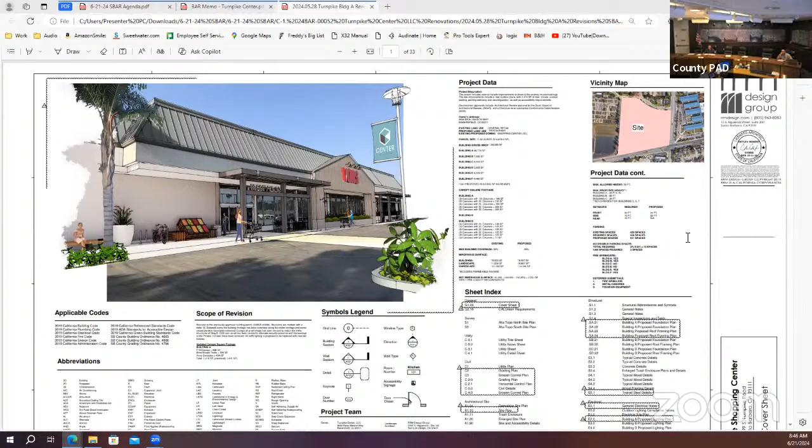Okay, I looked at the drawings online, everything seems to be fine. What we asked for was a rendering, and there were some landscape comments that I think you addressed too. Robert, you may want to look at that.

It's always at the end, Robert, I'm sorry. Planting, yes, yeah. Oh yeah, bike rack details. Is there such a thing? Do you have the bike racks? Oh, okay.

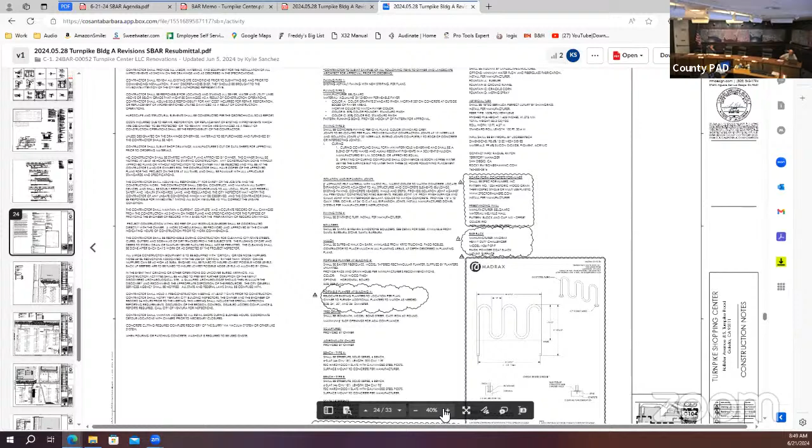I see it there on the left of the bike rack. Good to go? Is there planting specified for the pots?

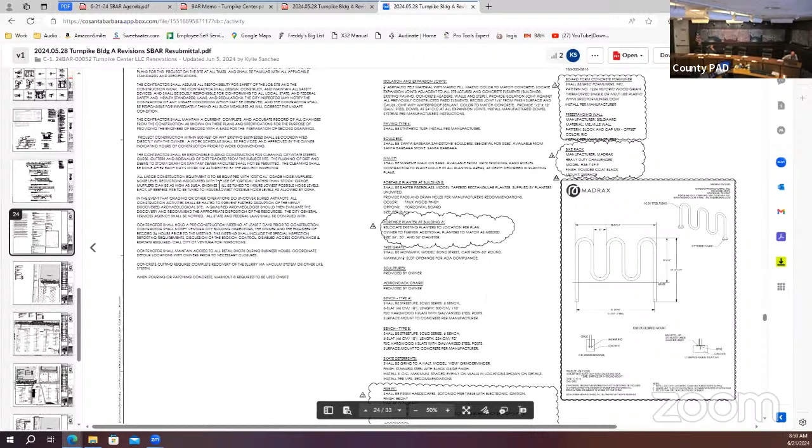If you want to do 33, correct? Well, mine said it's a little different.

Okay, yeah, I just went through the plant list. I think it's all good, and that stuff will work in the pots. So I think everything is okay, been addressed, ready to go. Okay, we'll approve it at the main meeting. Okay, thank you for coming.

Oh, really? Okay, maybe on consent. Okay, great. Nice seeing you in person because it's everything's online. So

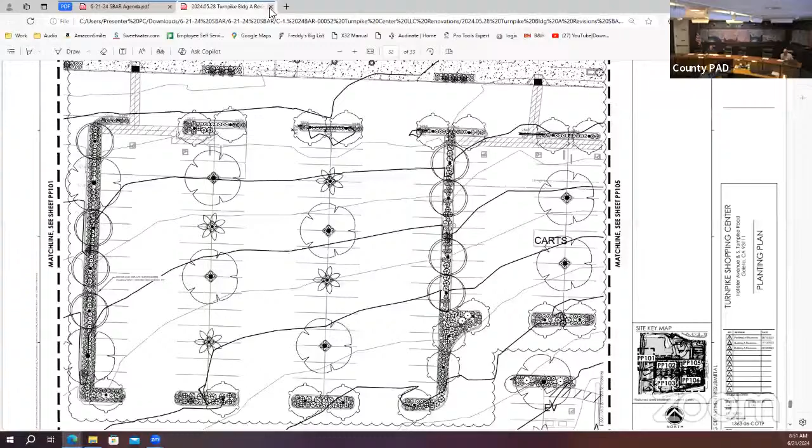Was the detail demonstrating the color of the Vons trellis, was that?

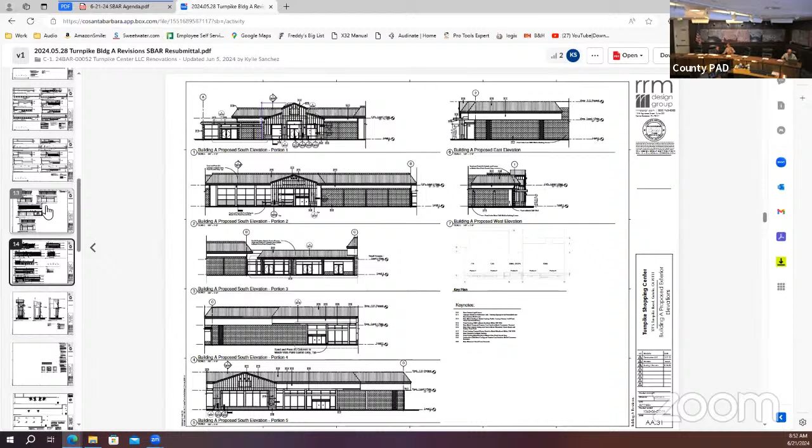It's just the color of it. Okay. And now it is, oh, you just slightly adjusted the color. Okay, sounds good to me. Thanks.

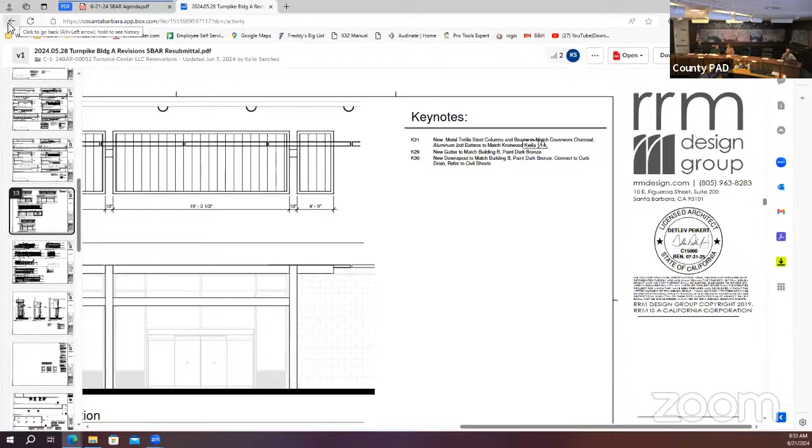Yeah, it's a big improvement to what it was before. Planting looks good from the corner too. So.

Oh, yeah, that's a high traffic environment right there, huh? Yeah. Well, don't all the kids, they go over there to get lunch too. Yeah. They let you cross the line. And they got that hot dog place right there, right? Yeah, yeah.

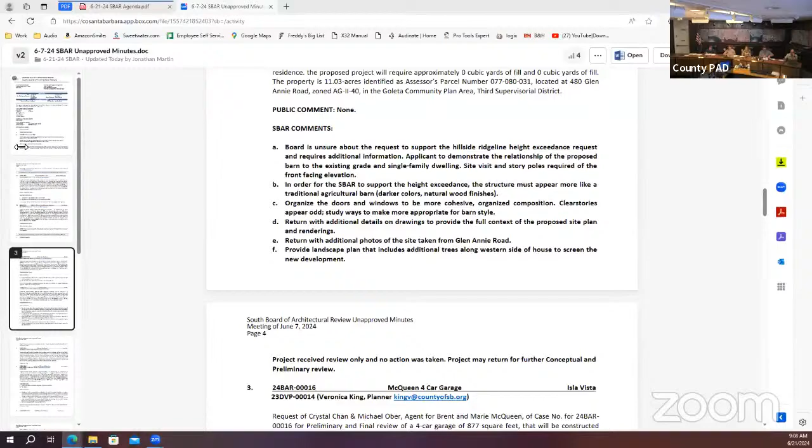I think it was something like provide access from sidewalk through front facade to shared open seating space. It was like we wanted a door that was in the middle instead of just pertaining to the businesses. Or could it say an opening? No, not necessarily a door. I mean, some sort of access and opening. Yeah, how about provide more open access along sidewalk?

Connecting sidewalk to shared seating space. Well, the problem with that is you're gonna lose landscaping if we just add more hardscape out front, and it's already right up close to the sidewalk. So I think it was more about just the sense of connection from the street to the interior of the structure. And I don't think it has to be a doorway necessarily.

I think there was confusion because whoever made that comment didn't realize that the big storefront windows also had a door. Yeah, yeah, yeah, but I made that comment. I heard you, somebody said it and they said, oh, okay, yeah.

We also wanted a sense that the patio should move to the sidewalk side rather than the freeway side. Does that comment say that? Yeah, it does say it. I think the comments are fine.

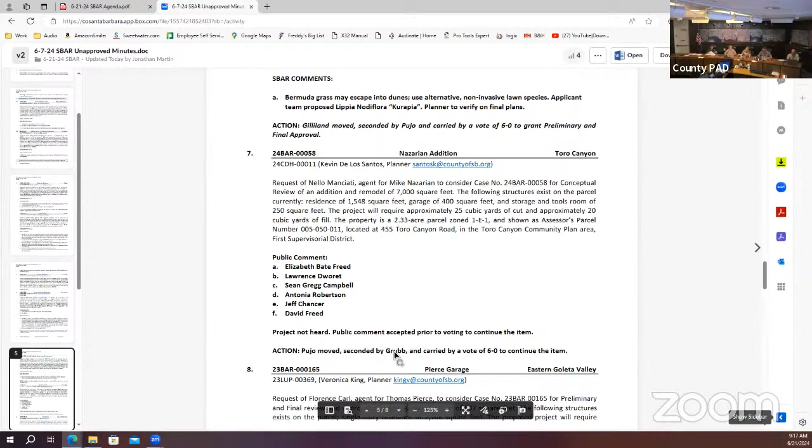It doesn't matter too much, but I don't think I was the second on that. Maybe I was. Trying to remember now. It doesn't matter too much probably. Okay.

On number 8, it says public comment none and then lists people. He just stood up, he didn't say anything. I don't know, thanks, got that correction.

All right, anything on 8, 9, or 10? They're all pretty positive comments. And 11.

This one was the tricky one with the ADU and the modification for the front yard setback. Like what we said, yeah.

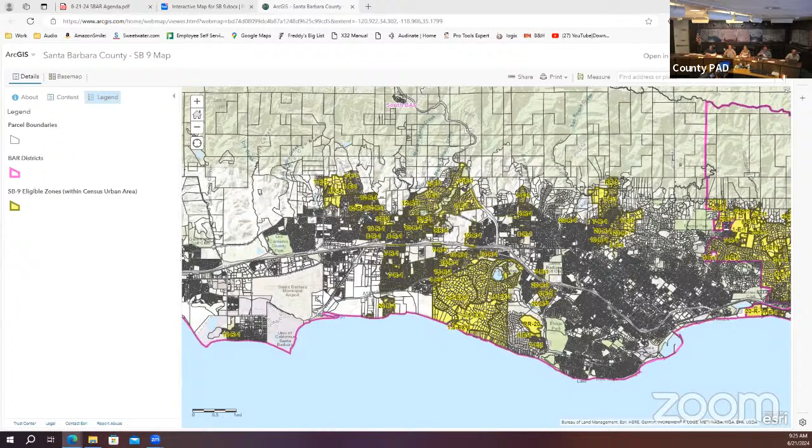Yeah, if we go to 9, I think 11 is a good page to go. Would you like to just pull up that PDF that you had earlier? In page 9, go to 9. Yeah, there you go.

Facade, does it mean front elevation? Where does it say there? Building facades more than 30 feet. Do you mean by facade? Usually in the dictionary, or architects understand facade as the elevation facing the street or facing the public. Is that what that is meant, or what? No, that's not what we meant. It's just meant to be any elevation, any wall or elevation more than 30 feet in length. So then it should say building walls, because it's clear, because facade means only the wall of the front there. Got it. Okay. Is that what you want to say?

And I have a lot of questions on 11, materials and colors. Rather than building walls, should we say building elevations? Building elevation, I think yeah, more- walls is yes, no, maybe too little specific. Building elevations, okay.

This is difficult. The first point is a little bit redundant in terms of materials. It says stone veneer, and then it talks about granite and slate, which are also stone. And then it talks about stucco and plaster, which are synonyms. Stucco is what people not in the trade refer to as cement plaster. So I would suggest to just say wood, composite wood, stone, brick, plaster - and in parentheses put stucco if you want - fiber cement, and then vinyl or metal.

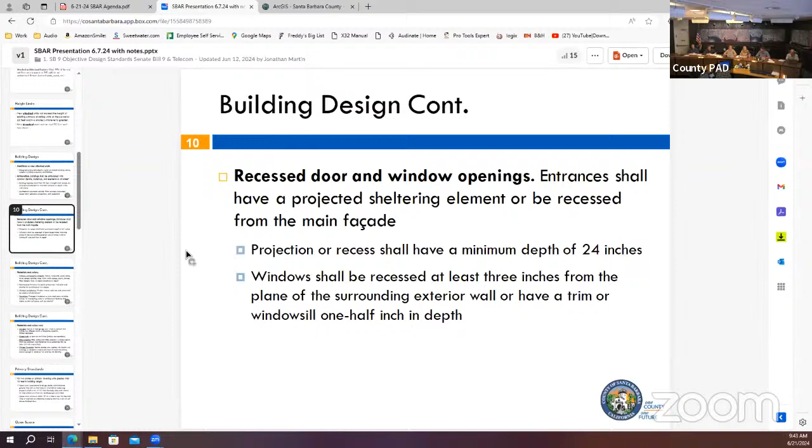So let's go back to page 12 then. So we have something for slope roofs already, right? We have some language. Then we need another point for flat roofs - how about flat roofs establish hierarchy, use darkest cool roof.

Well, there's two things. One is to establish a hierarchy of forms - maybe the parapet height, breakups, or some detail in there, or different heights of roofs - that's one thing. The second one is the color, right? Can it just be as general as 'establish hierarchy' and not mention parapets and all of that?

And then the second point would be use darkest cool roof possible, or ballast. So right now we have the LRV value of 0.84. Would that address that on the roof? White roof, for instance? Oh, maybe.

Yeah, but I'm not sure if that's how you measure white roofs. I'm not sure if that's for reflection on metal roofs or something like that. I'm not sure if that works on white roofs, on flat PVC membranes - just looking at color.

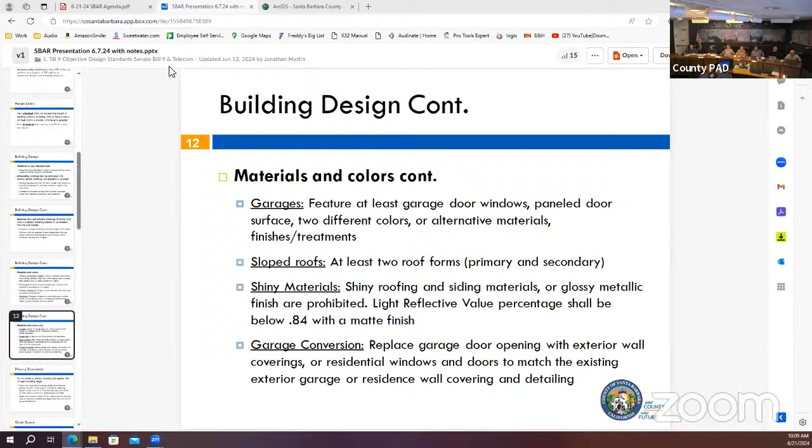I had a question on page 6, where you talk about maximum unit size and the 0.2 FAR. On a bigger lot, 8,000 square feet or more, 2,000 gross square feet is the max. Now, if somebody has an existing house, how does that work? Because a lot of houses are already more than 2,000 square feet.

So the way this is currently structured, we're still playing around with these numbers to figure out what's appropriate and reasonable. If you have opinions on these square footages, feel free to share them. But the concept is if you already have a large house, say you're on an 8,000 square foot lot and you already have a 3,000 square foot home, then your second unit would be limited to, what is it, 1,000 square feet. So you'd have to reduce your second unit in order to meet that overall combined FAR of 0.4.

So if you have a really big lot, then that 0.4 FAR goes up. We were thinking about this, still having to cap it per unit, so it's still capped at the 2,000 or 4,000 combined. Interesting. Otherwise, it has to go through the normal process.

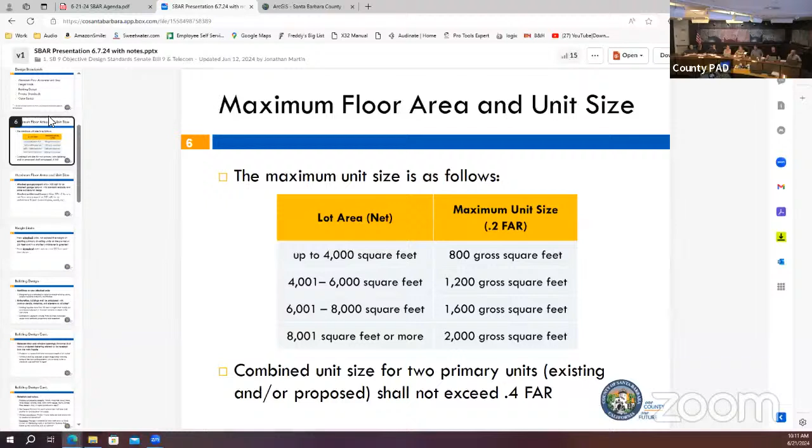Okay. And then the other one is on page 7, the attached architectural feature for porches. I guess it's all right, but I've run into it where it's not a very big number for a porch, and porches are usually really an important architectural aid to buildings. They help buildings, but you're so limited in the size.

I think it should be higher, maybe 25% at least, rather than 20%. But it's capping at 240 square feet, that's not very much. Well, another option is to keep the 20%, but just remove the cap. So if you had a 2,000 square foot residence, then you'd get 400 square feet.

If the unit is small, then 25% is not that much. On the ADU, it was a small ADU, and they wanted a nice porch on the front, and they couldn't do it because of this. If they have a 500 square foot ADU, then yeah.

So is 20% the right percentage? Well, I thought 25 gave a little more flexibility. But this is the required minimum at 20%. No, that's the maximum, that's as big as it can be. So if you have a 1,000 square foot building, it can have a 250 square foot porch, which is not very big. Well, that's 10 by 25. That's not so bad, or 12 by 12.

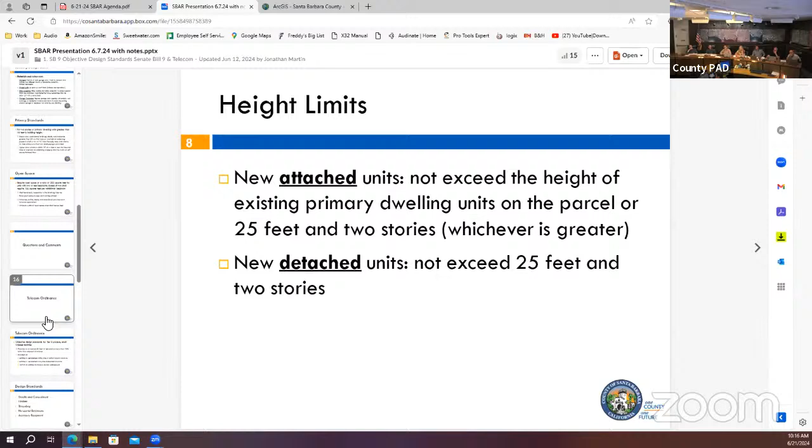I think you wanted to go to privacy standards, slide 13. Yeah, this is a big deal, because when you start getting to the minimum areas, the next page talks about 300 square feet.

Well, let's start with this page. The first one is used in Carpinteria, and I'm not sure how Santa Barbara deals with that, with the porch facing the neighbor.

When they talk about a 6-foot minimum landscaping, what is that? Is that the height of a hedge? How is a 6-foot hedge going to block a 2nd-story landing that starts at 9 feet? That was my question. So what exactly is that?

Technically speaking, it probably wouldn't, unless the hedge grows a little taller. Well, it has to grow a lot taller. We were struggling with that a little bit, and one of the other CBAR members raised the same issue, that landscaping, while great, a hedge would not create privacy from a 2nd story looking out into the adjacent property.

So if you have 10 feet from the side, then yeah, you can put some nice trees in there. If you're only 4 feet, then you're stuck with a hedge. Well, if you have an ADU on top of a garage, you come from the side.

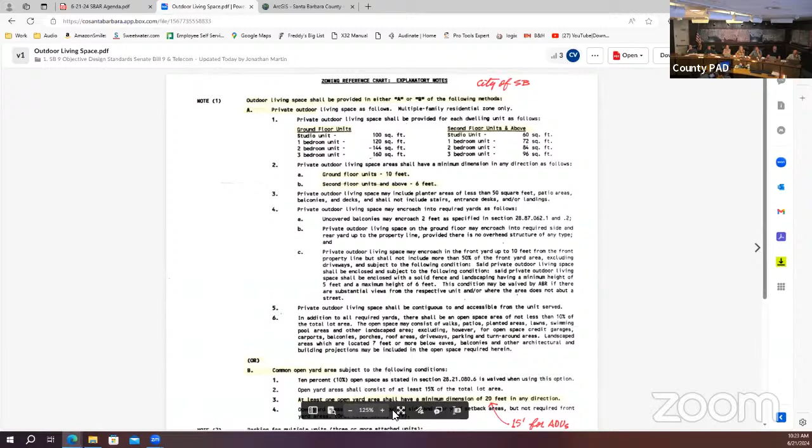Yeah, they have 2 systems. The Santa Barbara has 2 systems: one is the private outdoor, and the other is the shared outdoor. You can have either A or B. This is multi-family residential, but that is what SB9 kind of tends to lead to. Once you start having second and 2 or 3 units on a lot, those are the sizes, and the balconies are usually second floor units. The balcony would be 6 feet. Architecturally, a 6-foot deep balcony is problematic, but somehow you can work it out.

But they are much smaller, and this is what would be appropriate for IV, Isla Vista. Given the 10-foot width, IV is going to be, as a minimum, challenging. I'd like that to be possible, but it gets tricky with such a broad range of properties. I know when we were looking at the ADU ordinance in Santa Barbara, there is a common space required to be 20 feet minimum. For ADUs, you were in the discussion, we managed to lower it to 15 feet instead of 20, for an open yard of 500 square feet or whatever it was for the whole unit, smaller width.

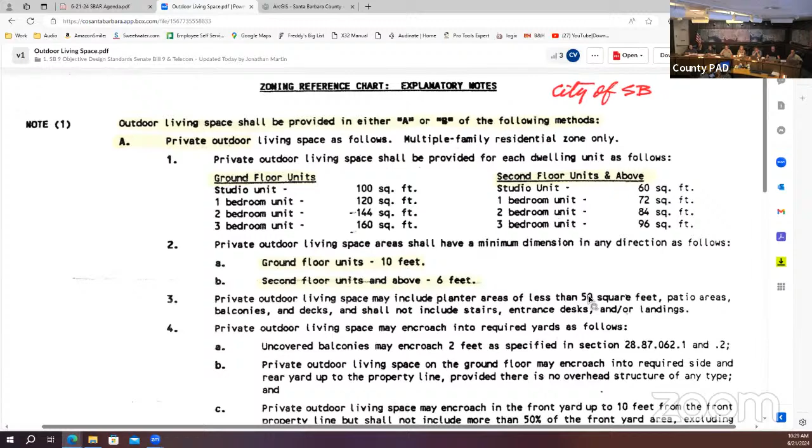In this one, if you go down, it says private outdoor living space may encroach into required front yards if you don't exceed this, et cetera. So he's at 4C right there.

Private outdoor living space may encroach into the front yard up to 10 feet from the front property line, but not include more than 50%. So it can get - and then corner lots get really tricky because their whole property's front yard.

I just don't know how much we want to qualify it, or if we want to just give a percentage, and maybe something about it not being more than a certain percentage of the front yard setback.

I like that. So 5% - sorry, look also at the 6. It says in addition to that, you get not less than 10%. Anyway, it's hard to come up with the right number here, only considering the block of area that's that minimum dimension - it creates a rectangle of space.

Because you also have setbacks and all that, and different lot sizes have different setbacks, so it's really difficult - there's a lot of variation there. The way it's currently set up, you could use the side and rear setbacks, just not the front. I think that's how the city does it too.

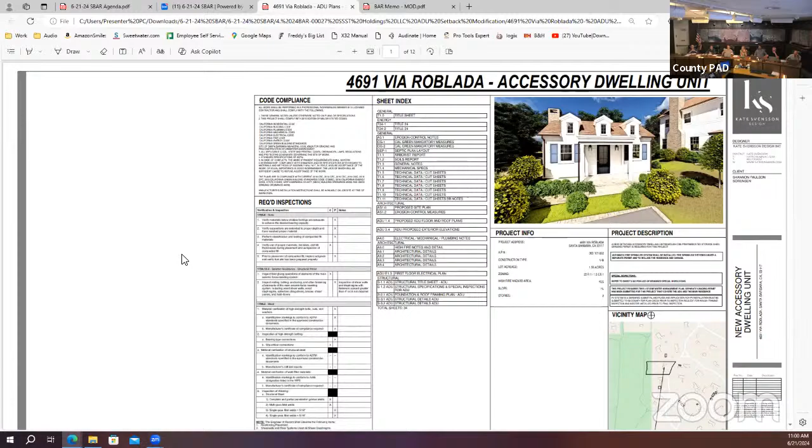Previously? It's minor in nature. Yeah, we did. They were only here for concept last time, so we'll actually have to make the motion and the finding today. So they can just respond to B.

Yeah, so if you can give us your presentation and focus just on the one comment you have. Yeah, I'd be happy to.

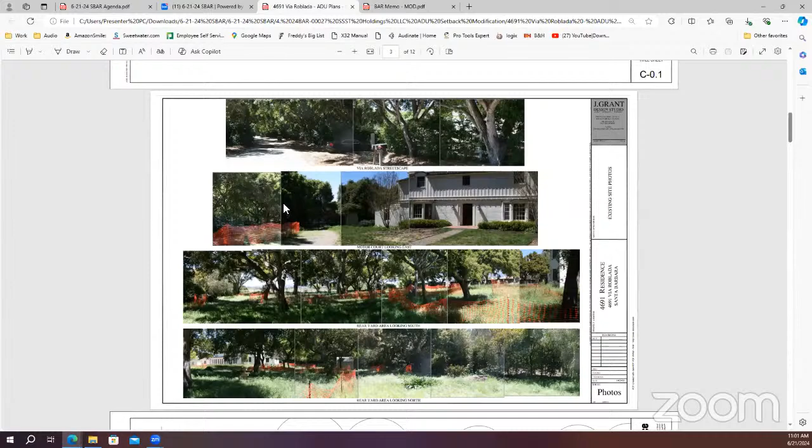So there's the existing site photos. The one comment was related to what's happening with our closest neighbor, and to get that information onto the site plan, which I did. So if we go to the site plan, it shows the neighbor's existing driveway and garage. Where our ADU is being placed is closest to the neighboring driveway and garage, not a private outdoor space, not even a front yard space - it's just really their access drive to their garage. Those are the only comments that were made from the previous meeting, and those are on the plan now. Yeah, there you see it right there, exactly.

Okay, Hope Ranch has looked at this and they've approved everything, just so everybody knows.

All right, so move on to any questions from the board? And any public comment? We have received no request to speak for this item, and we have nobody present during the hearing. Okay, we'll close public comment and move on to comments from the board.

Since it's minor enough, does anyone have a comment? And would someone like to make the finding? Yes.

I mean, I don't think that it's necessary. There's a lot of space there and it's close to the driveway. There's not very much room for landscaping to shield it, and there's a lot of space on the lot. That's just my opinion. So you don't think the modification is necessary?

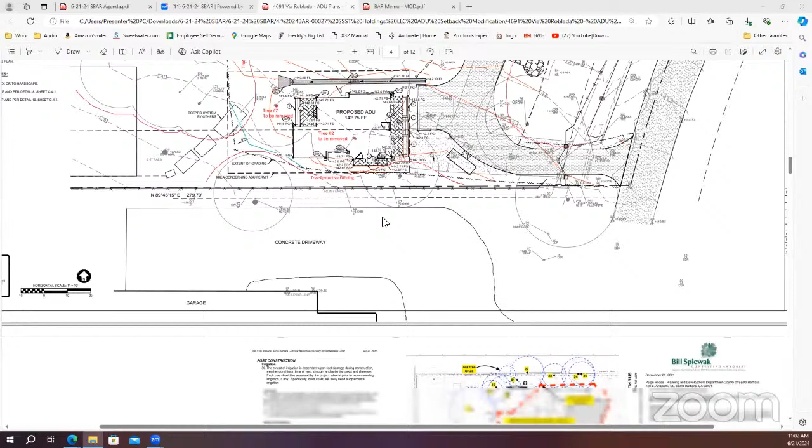I don't know, we'll probably have to take a straw vote on it. Can you zoom out on the whole site? Yeah, can I comment on that? You need to look at the arborist report. Yes.

Okay, so does anyone else have any other comments? Or someone wants to make a motion? Or I'll let the applicant respond.

I disagree, I think it's a good location. It's shielded by existing vegetation. There's a driveway on the other side, and it seems easy to access. It kind of makes sense. It's also a charming building. Jonathan, can you show the elevations, please? There are some renderings, and it just seems like - it's a one story building.

It does have attic windows, but I don't feel strongly about it. I mean, I think that the modification is reasonable, that's my take. Does anyone have any other comments before I let the applicant respond?

Okay, you can have a minute to respond. Yeah, so I just want to comment on the placement.

The lot is a sea of oak trees, and Bill Spiewak, our arborist, did a nice job delineating all of them. We're putting it there because there really is no other spot. We'd like to maintain all the oak trees - they're beautiful, it's a fantastic thing about the site. This is the spot where it least impacts the existing oaks, which cover the property from one side to the other.

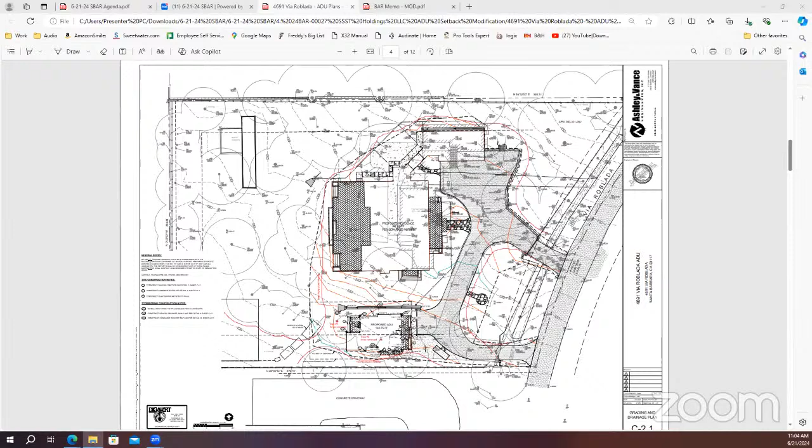There's an ample amount of vegetation between us and the neighbor just existing - a whole series of oaks and hedging that runs along there that doesn't need to be disturbed at all, and actually provides a very nice buffer between us and our neighbor. Okay, that's all. Thank you.

The only question I might ask is, is there a reason it couldn't be a little closer to the main house? I didn't see trees that were problematic there. It might give a little more room for buffer. There might be 2 trees there.

Can you scroll down to the plan that shows the trees, and maybe in Bill's report - like trees 3, 4, 5, and 6. I don't know if they're oaks.

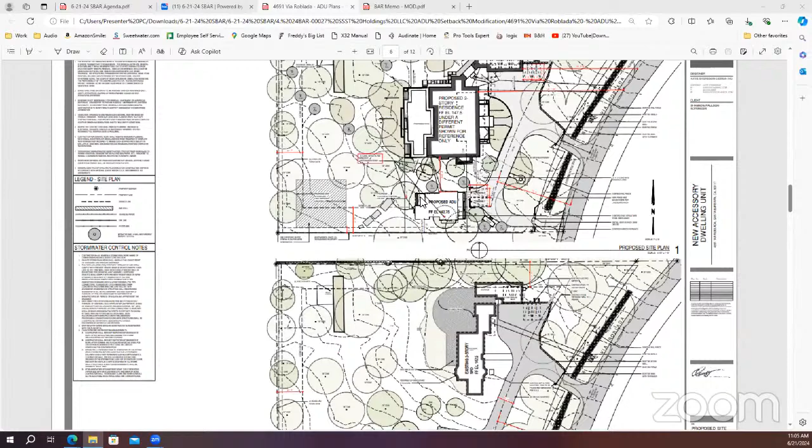Yes, there is another oak that's in between us and the house. So again, this placement was trying to eliminate as best we could the damage. We have to remove 2 oaks as it's laid out here, so again we were just trying to have the impact be as least as possible.

On the screen now, are the 2 gray oaks the ones to be removed? No, it's the one that's actually in the footprint, and there's one right behind the footprint. Then there's 3 oaks between us and the house, you can see.

Right, so it's just trying to mitigate - we're trying to eliminate the amount of oaks being impacted. We knew that at the very least we were going to have 2. Our closest point to the property line is 13 feet - do we have a foot or so to play with, or a foot and a half?

I would agree that we probably do, looking at this, and if the board felt we needed to - but we thought it was in the best place. Any more comments from the board?

Are these circles shown here the critical root zones? I believe, yes, they are. Bill has a report that probably has the critical root zones shown more clearly. He's what, 12 feet into the setback? Well, 13 with - looking at that diagram, you could cut that in half.

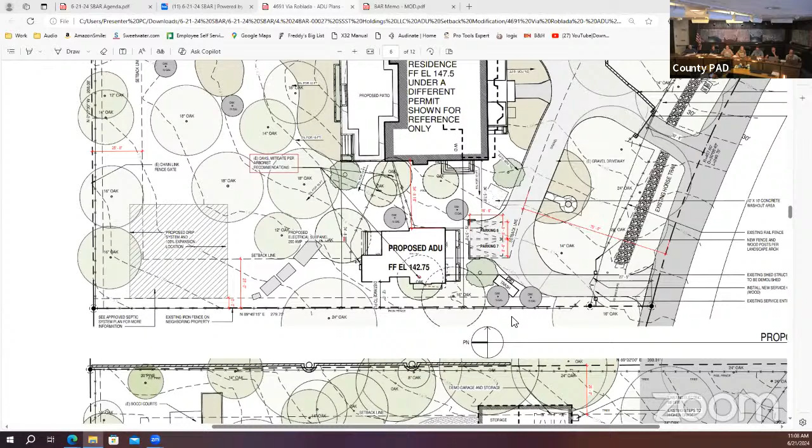Let's make a motion for preliminary approval of the project as submitted, with the modification finding that it's minor in nature - the modification is reasonable and the location is appropriate for the proposed structure, sufficient screening is existing between the proposed structure and the neighboring property. I'll second. All those in favor? Aye. Aye. Motion carries. And we'll move on to item 3.

Thank you, thank you. I have to recuse myself from item 3. Thank you.

Okay, this is item 3 for 4683 Via Roblada, in Hope Ranch, HR Property Holdings Trust. Here we have the applicants in person, which is very nice, so we'll communicate online.

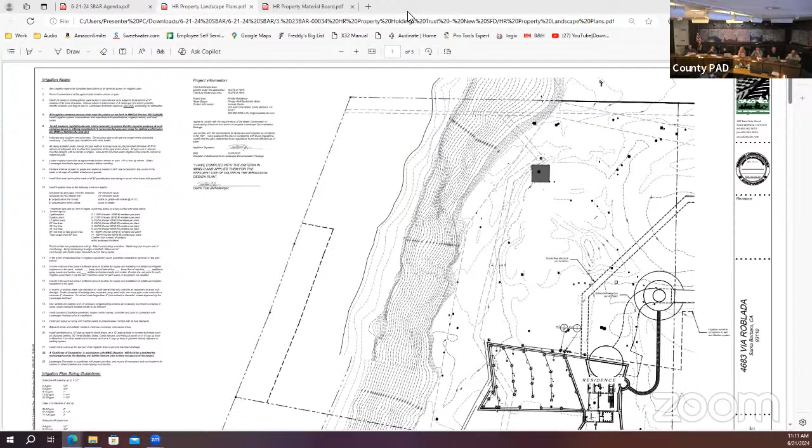The projection that goes over the height - that did have a maximum, right? I think, based on some rules, it can only be 8 feet higher or something like that, so we adjusted that down a little bit. But the planning commission was very appreciative of the project, said it was very unique, which it is. We're looking forward to finally making it a reality. So I think we're here to answer any questions, really.

But we want to show the elevations maybe on the render. Yeah, put those up.

Two more, counting from the top there. Renderings down, down there. Yeah, right there. There you go. Can you blow them up a little bit?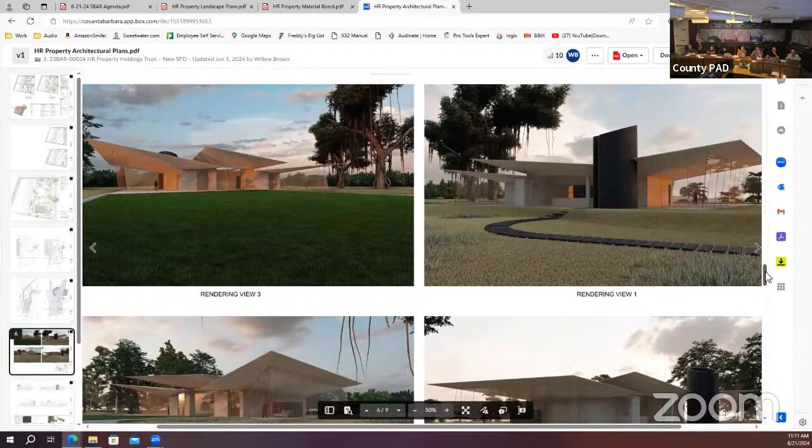So this is interesting. We've actually been working with the structural engineering firm Eckersley O'Callaghan, which does a lot of work for the Apple stores, relative to this glazing. The glazing is partially supporting the roof. The glass is, I think, around 4.5 inches thick. It's pretty extraordinary engineering to achieve this, but so far, so good.

What's this roof material? It'll basically be a white Sarnafil roof. That's something the Hope Ranch Board was concerned about—they talked a lot about issues of reflectivity. But we demonstrated to them that because of the angles of these roofs, there really isn't a reflection issue. The closest neighbors who could see this roof are on that hillside, probably over a mile away. The actual surface you see will be a plaster kind of finish, and it will be a white element, as this rendering indicates.

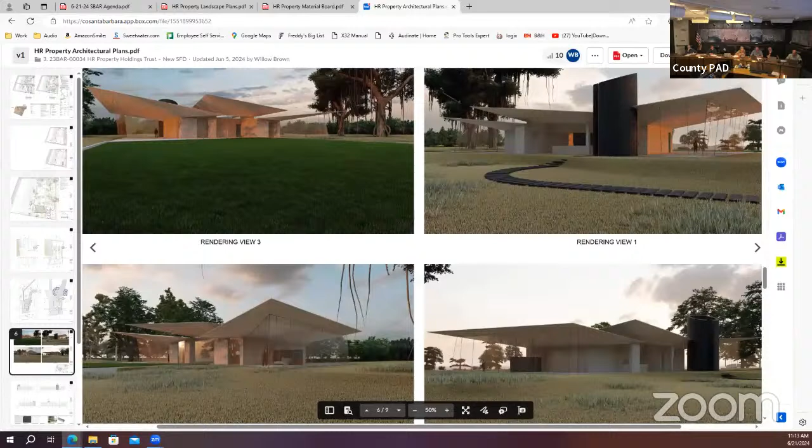What else do you have, I imagine it's plaster? Basically, the massing walls you see are concrete walls. The roof is a steel frame that will be clad in, at this point, either plaster or something like a GFRC panel—that's still being determined. But everything you see, that dark concrete element at the entry and the other vertical walls, are all poured in place.

Anything else you would like to show? No, that's it. Any questions from the board? No questions. Do we have anybody online, any public comments? We have nobody signed up to speak, and I believe our one attendee is for item number 8.

Okay, so we're down to comments then. I think we were fine with this. Changes—I think it stands by itself as a piece of sculpture without the people. It's really well done, and the thin composition and relationship of the roofs and glass is really good, really appreciated. I was just gonna say, it's the same as what we saw and we loved it before, so I don't think there's much else to be said.

I would make a motion for preliminary approval as submitted. Okay, first by Chris and second by Josh. Totally agree. Now, the drawings are a bit underdeveloped for the preliminary, but we'll give you a pass—we expect full drawings for final, please. All right, this is a motion and a second. All those in favor say aye. Aye. Opposed? Okay, motion carries.

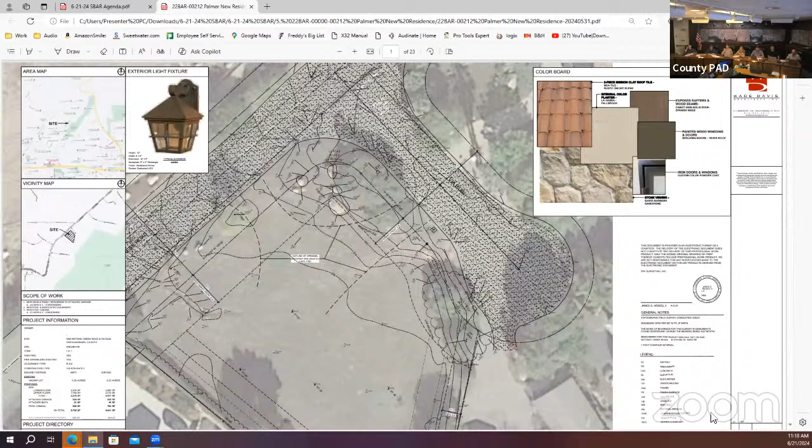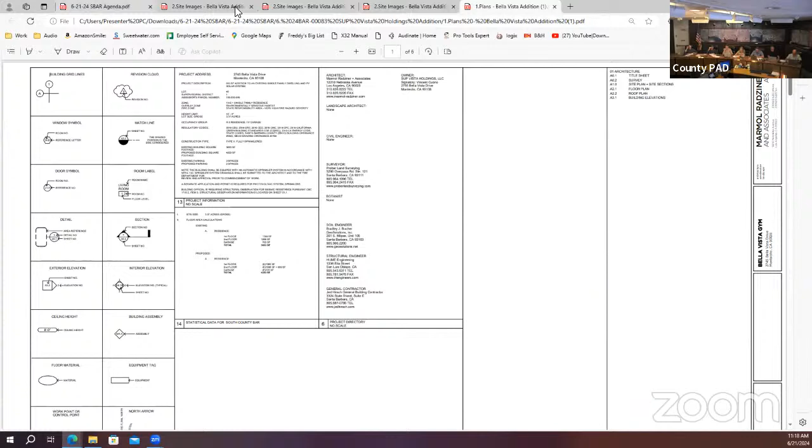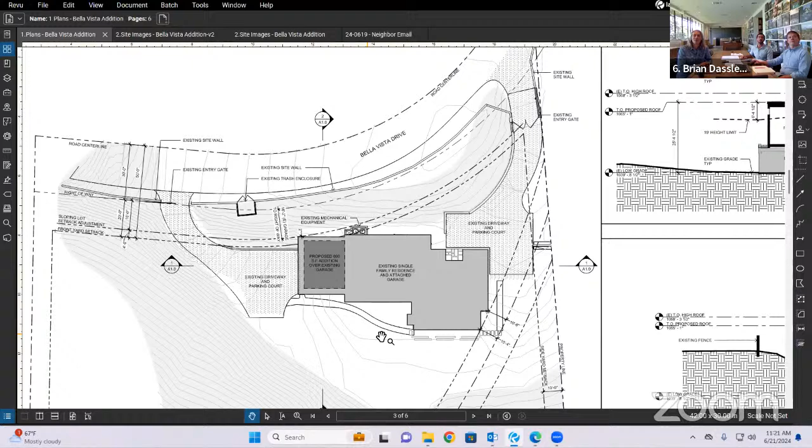We're actually the original architects that worked on the residence at 2745 Bella Vista Drive, and we're here today to present a 600 square foot addition to the house. The proposed addition is going to be over the existing garage, which as it stands is a one-story structure, situated on the west side of the building. As you can see in the floor plan, we're adding a gym over the existing garage. We've retained some of our green roof as well, just to buffer the architecture from the landscape.

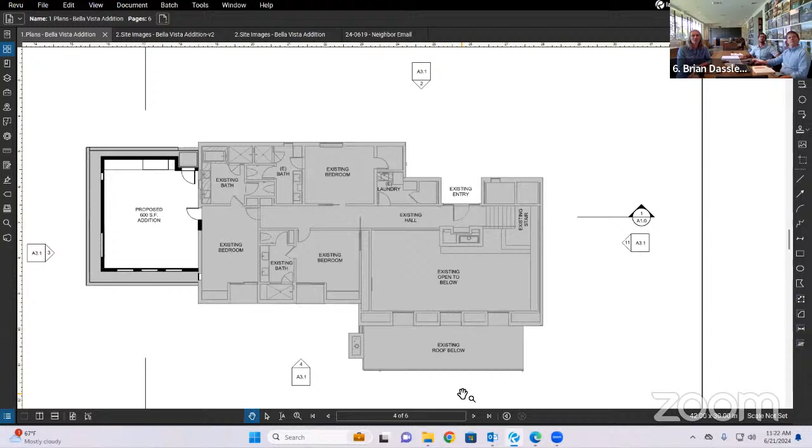The addition itself, we're not proposing any plumbing. It's really just a simple 600 square foot addition. There's a connection to the main residence, and then we just have a small access way outside for maintenance. Additionally, we are proposing a solar array on the roof as well.

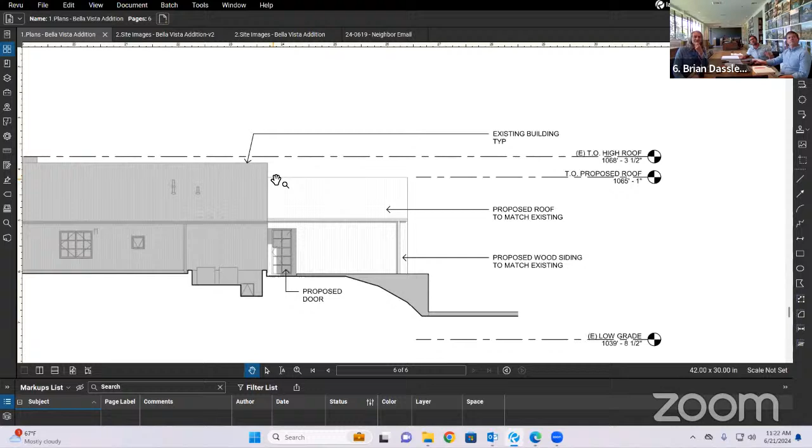The idea of the addition is to seamlessly integrate with the existing residence itself. We wanted to follow the same slope of the roof, follow the same fenestration pattern, and use all of the same materials that were used on the existing residence. In many ways, we want this to feel like a part of what we have already designed and what is built on the site. The roof line itself has been designed also to terrace down and step with the existing terrain.

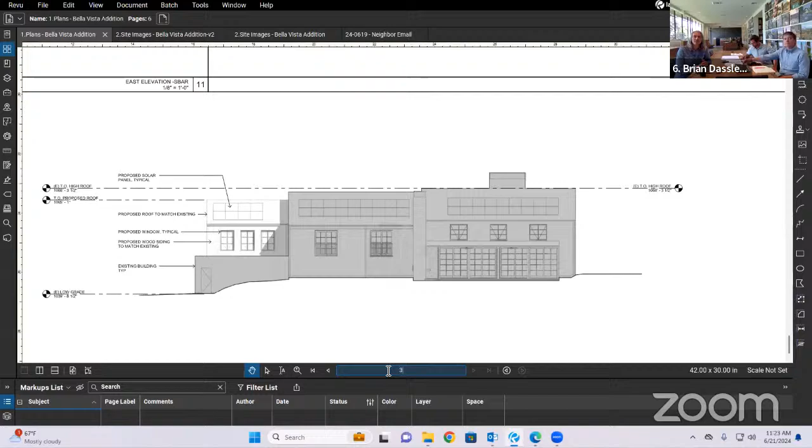Section. So I think the main question for us, and what we would like to present to you today, is that we are requesting an additional 6 foot 4.5 inches to the allowable height limit of 19 feet.

In building the existing residence, the site was graded down roughly 7 feet at the garage level, which brought down what is now our existing grade. So we're here today to discuss the idea of building 6 foot 4.5 inches above the 19-foot height limit. Even though that's technically the existing grade now, the perceived situation would have actually kept it below the height limit had this been part of the original design, had this been proposed originally.

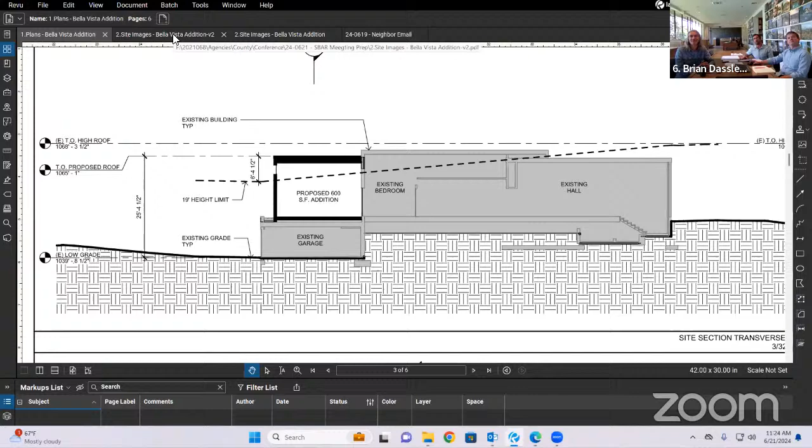And then I think we've also just got some photos from the street and on site to show what you can see from Bella Vista now. So we're just going to look through those briefly.

So this is looking east from Bella Vista towards our property. On the right, you can see where the hedging breaks and we've got our existing driveway. Next, this is a little bit closer. Again, there's great planting and trees screening our site from the road itself.

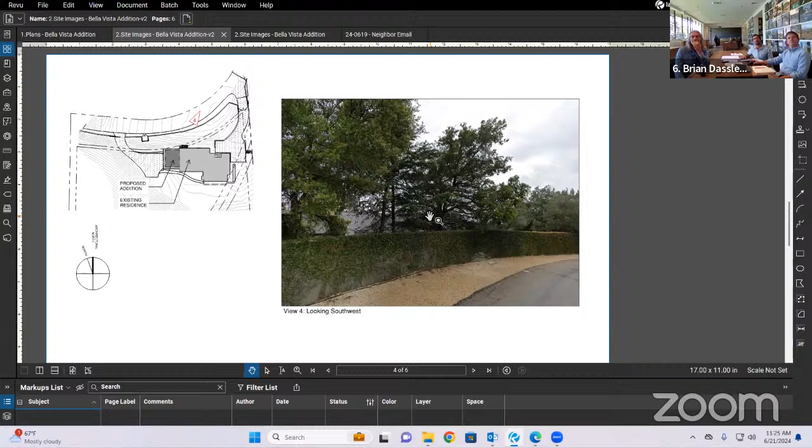And now looking from the other direction, you can just make out the existing roof line in the trees there. A little closer here, again you can see the existing roof line and the screening that's already on site. And then we have a couple of pictures of the existing residence.

So this is just looking down. It's vertical wood siding and metal roofing, all non-metallic or non-reflective. And so the new addition would be on top of this green roof you're seeing here on the right-hand side, and it would be lower than the ridge of this existing building.

That's right, I think we understand. I'm noticing in the folder we don't have a planner memo requesting, but this is going to require a variance. There's no planner assigned, it's just conceptual. All right, so we will move on to questions from the board.

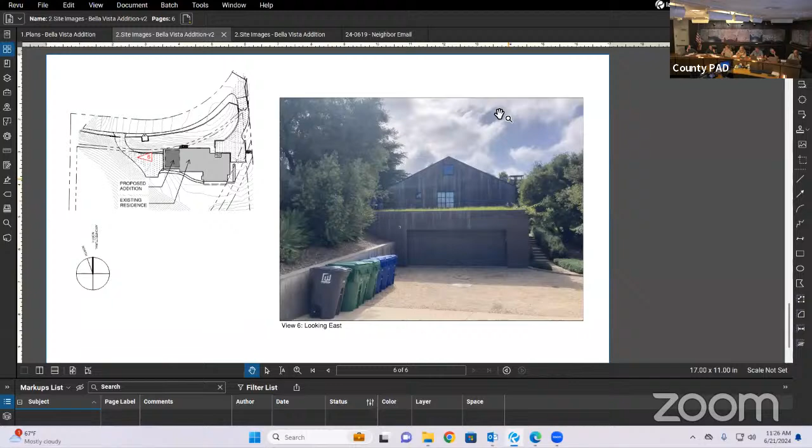Does anyone have any questions? Pretty straightforward. One question: the material of the garage, is that metal or what is that, or the plaster? Plaster, yeah, it's plaster. And the addition, what you're putting on top is going to be the siding?

Yes, it'd be the same wood siding, that sort of stained wood siding that you're seeing there. The windows, everything actually would match the existing residence, that's the plan.

And would you have problems keeping all the planting on the roof with your addition? It's going to be more like a 3 foot wide planter, right? Is that a problem with moisture etc.? No, it shouldn't be a problem. We do those sorts of green roofs pretty often on projects where you might have a 2 to 3 foot sliver of green roof, and we found they're easy to maintain and we haven't really come across any issues.

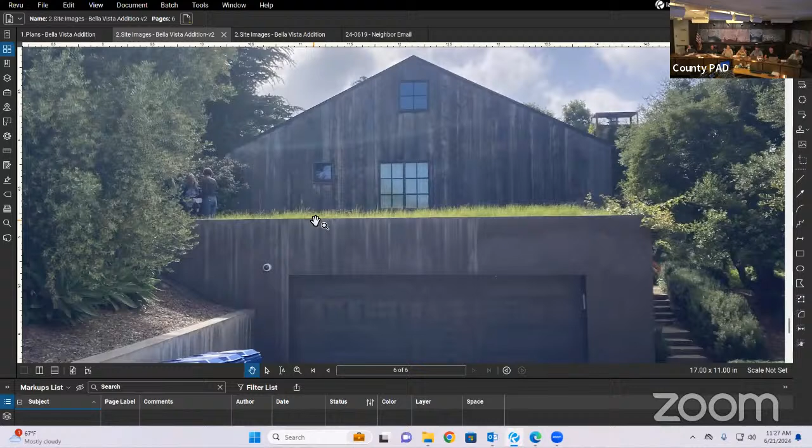Okay, thank you. All right, we'll move on to public comment. There's one letter in support in the folder from a neighbor. So is there anyone else online? We don't have anyone in the audience today. We have nobody signed up to speak and we have received no letters.

Oh, I'm sorry, we did receive the one neighbor letter, they had coordinated to make neighbors aware, but we have nobody signed up to speak and nobody currently present. Okay, all right, we'll close public comment and move on to comments from the board.

Start with John. Well, I think it matches well and it looks good as if it were always there. That's our hope. I agree, yeah, it's a fine project, it's definitely approvable. Yes, I agree, actually I think it completes the building and it's really not visible from the neighboring road. It's not going to change the visibility at all, so yeah, it's a good project.

Oh yeah, I agree. I would support a modification if necessary, once that's determined where the existing ground plane is. Yeah, so I'm in support. No further comments, I concur with all the previous comments. I agree with the positive comments as well.

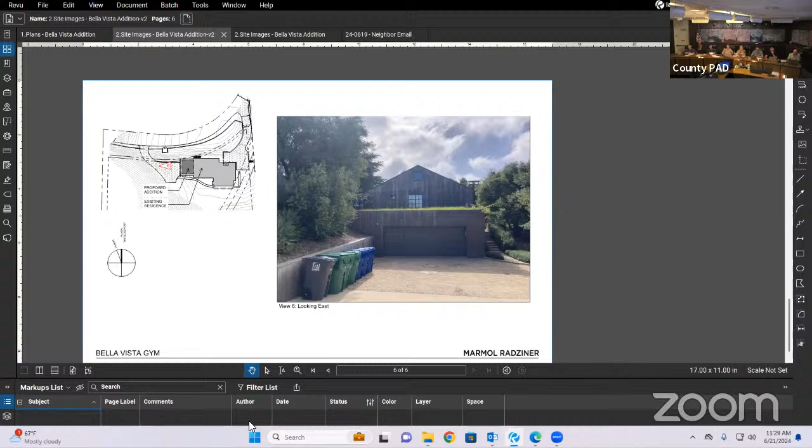The request of Crystal Chan and Michael Ober, agent for Brent and Marie McQueen, here for a preliminary and final review of a 4-car garage of 877 square feet. It will be constructed below with an ADU above. The following structures exist on the parcel: a 2-story, 4-bedroom single-family residence, including an attached 2-car garage, with residence totaling 2,663 square feet. The proposed project will require no cut or fill. It is a 0.23 acre parcel located at 6778 Del Playa Drive in Isla Vista.

I'll read the comments briefly. Existing tree grounds the structure, identify tree and canopy of existing tree, and clarify whether it will be impacted by the proposed structure, protect or replace with new specimen tree. Make window fenestration consistent throughout. Consider casement windows throughout rather than double hung. Rafter tails project further out on roof of existing structure. Consider updating rafter detail on proposed structure to match. Study ways to improve garage elevation. Incorporate architectural elements such as an eyebrow over the garage doors. Incorporate planting along the fence line and along the street as a landscape buffer.

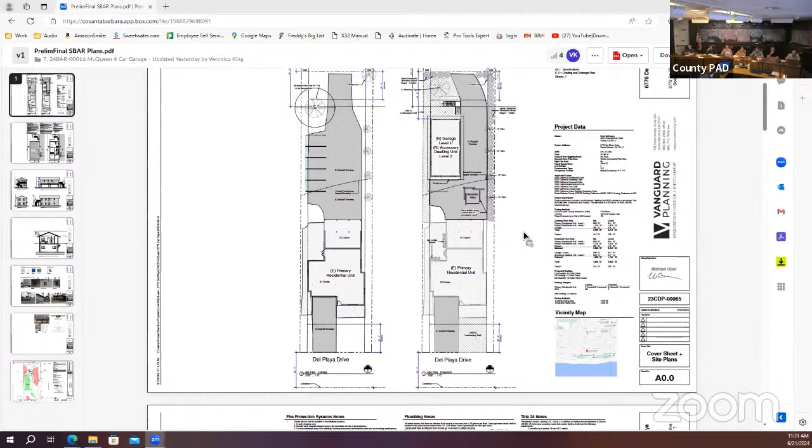Sure, I'm Jared Gorin from Vanguard Planning, and I'm going to take the comments out of order, going by which sheets we have up here. Starting with comment A, we studied this tree and we don't think the structure is going to impact it, so we didn't go through showing its canopy and everything. We're proposing a replacement for it with a Monterey cypress. We picked that tree because there are other Monterey cypress right around this property, which are all thriving and doing really well there, so we picked the same.

In terms of landscape planning along the fence and the street, we're keeping that Chinese elm tree and proposing to put in ground cover, a salvia, which is pretty hardy and should do really well there. We've got the existing 4 palm trees on the eastern property line, with roughly a 5-foot landscape buffer planned there to cover with ground cover. We want ground cover rather than a hedge because cars backing out of the garage shouldn't back into a hedge - we'd rather have something they can overhang.

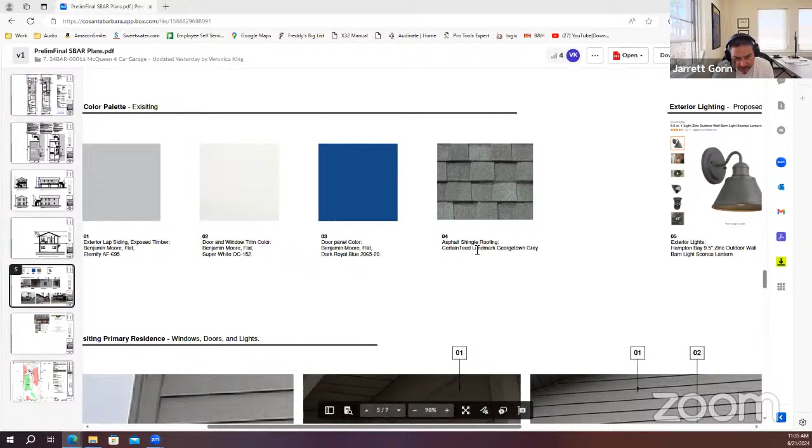There are some additional cut sheets on the next page, and then the civil page, which we don't need to get into - we're not doing a whole lot to the site, just some minor work getting drainage away from the house. That's everything I have, and I can answer any questions.

Sounds good, thank you. We'll move on to questions from the board. I have a question - what material are the windows?

I'm not sure, I think they're going to be vinyl windows. Pretty sure that's what's on the house. So we would just match that.

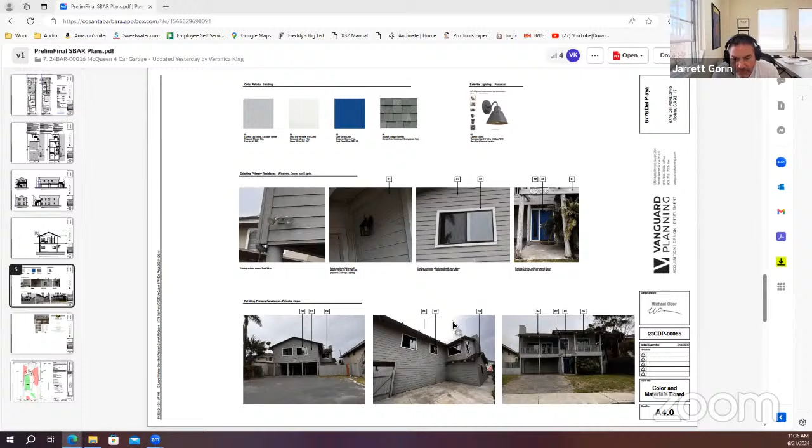They look more like aluminum in that picture, but anyway, sure.

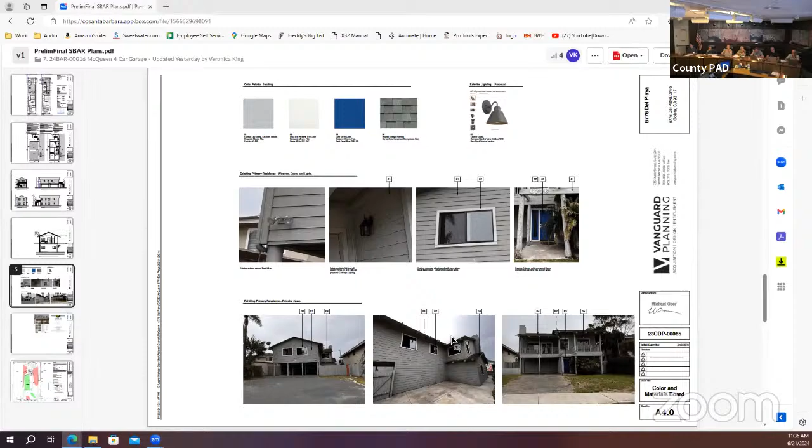Thanks, I have a question, Jarrett. The garage doors are not specified. Is that also to match the main residence, which looks like the body color, the gray? Yeah, we'd match the body color on there, and those are just going to be your standard roll-up sectional doors. We weren't planning any windows in them. I suppose we could put windows in them if that was going to, it might actually look nice with windows on that facade.

I guess I'd ask your direction on that. Thank you.

All right, any other questions? We'll move on to public comment. We have nobody signed up to speak, and we have nobody in the audience. Letters in the folder? Nope, no letters. All right, we will close public comment and move on to comments from the board.

We'll start with Val.

Well, those narrow sliders are really odd looking. I think you'd do better if you're gonna not do casements. I think they'd be better as double hungs. You may have had that before, but we were trying to get you to organize the windows. Sliders that are like 1 foot wide are really not good. So I think you'd do better to make those 4 windows double hungs.

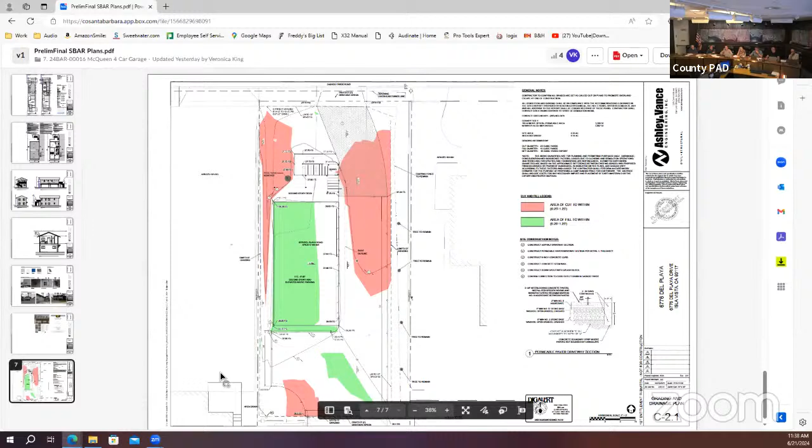This is sorry, this is a question, not a comment. Why are those windows so narrow? They're windows that are on both sides of what would be a TV wall in a living room. So if we made them wider, it would start making that room unfurnishable. So that's our goal there. You can see it in the floor plan. If we start making them a lot wider, it really cuts down on what you can do with that wall, which is really the only furnishable wall in that room that makes sense.

So let me ask the question. What's the problem with having those little windows be casement? What is the lifespan of it? How is that different? What's the problem with a second story window or even the first story windows? I don't know, I have casements in my house for the last 20 years and nothing wrong with them.

Board Member Peugeot, do you have 6 people living in your house that are students? Because it makes a difference. No, I don't. I have grandchildren. Okay, the grandchildren might be close.

But yeah, we're concerned about those things breaking and having to constantly repair them. And a slider window is robust and it's probably not going to break. So, and we have no problem with the double hungs. If you want us to go back to that, that's fine. We just want windows which aren't going to get destroyed. If you wanted us to go double hung on the whole thing, I think that would be fine too. But just give us a direction and we're fine with that.

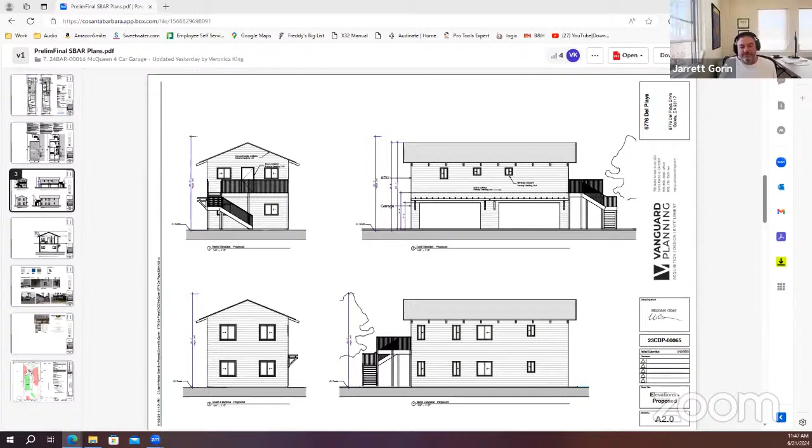Great. Thank you. All right. Thank you. We are moving on to the final item.

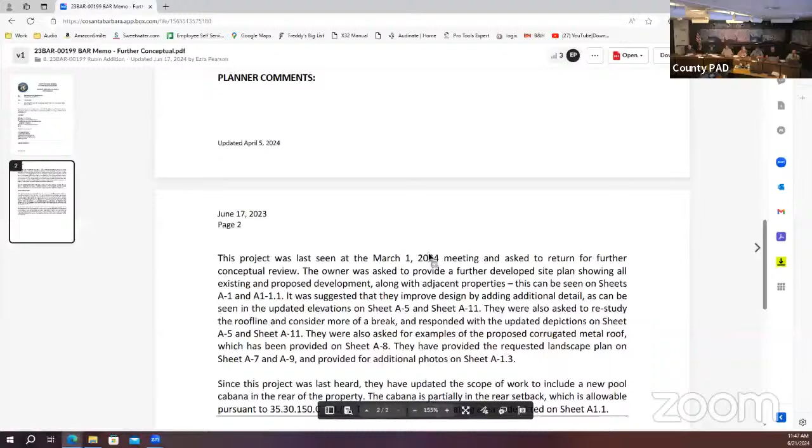Item 8, Rubin addition, request of Mike Rubin here for further conceptual review of an addition of 996 square feet to the existing residence. There is an existing 1,424 square foot single-family dwelling and a carport on the property. It requires no cut or fill. It's a 1-acre parcel located at 1041 Palomino Road in the Mission Canyon area. I'll read the previous comments.

Return with further developed site plan showing all existing and proposed development, including footprint of structures on adjacent properties and including all existing trees. The existing structure is ordinary and could use additional detailing such as recessed doors and windows. Restudy the roof line. It appears awkward as proposed. Consider more of a break in the roof line and study ways to incorporate fire-safe eaves where appropriate. Provide example of proposed corrugated metal roof, return with a landscape plan for areas surrounding renovated structures, and return with photos of existing on-site development. Provide photos of site from public views and photos of neighboring properties to provide context of the property and setting.

And it is here for further conceptual, and we'll read the planner memo. It was last seen on March 1st and asked to return for further conceptual. The owner was asked to provide further developed site plans showing all existing and proposed development along with adjacent properties. These are seen on sheets A1 and A1.1. It was suggested they improve design by adding additional detail seen on A5 and A11. They were also asked to restudy the roof line and consider more of a break, and responded. This is the kind of planner memo I like leading our comments.

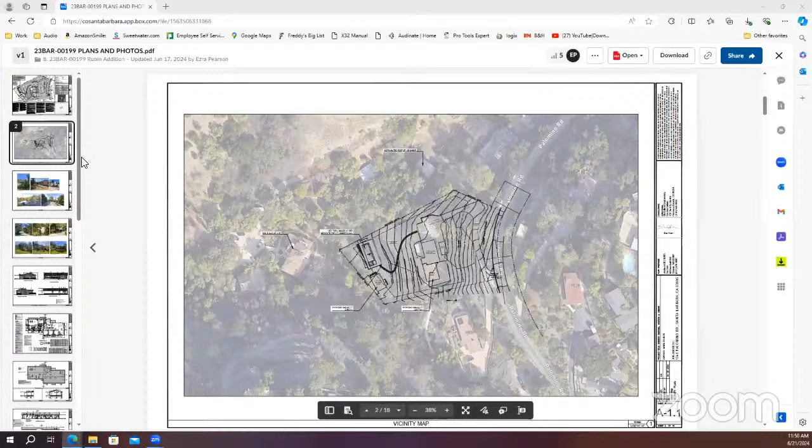I think that's it, if you're gonna go down two more sheets. Yeah, here we go. This is kind of like the context. So these are pictures from my house, where you can only see the neighbors at certain angles. One neighbor you can only see from the driveway. The other neighbor on Palomino, you just can't see at all from the property. That corrugated metal roof was the one I was referencing when we last spoke. That's their house that you can see from our property. So that's kind of the example.

And I think those are all the reference images. And then for the, what was the other note? Oh, the roof line redesign. Yeah, the roof line, and the architectural detailing, just additional detailing.

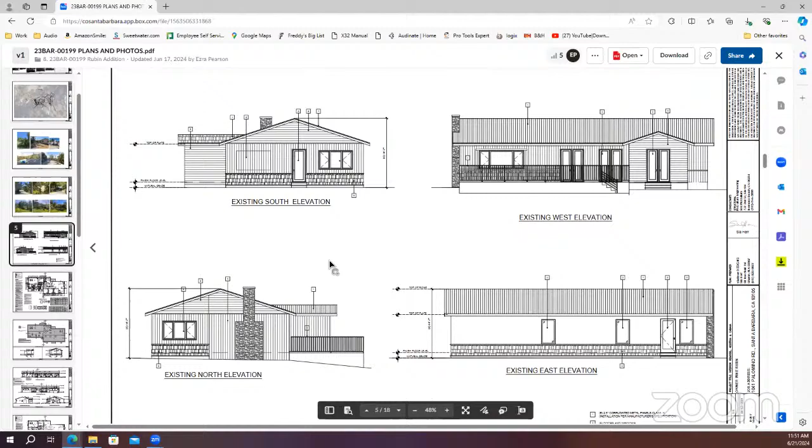And then we can go to the landscape plan. Okay, great. I believe that's on the proposed. So maybe go down 1 more, 2 more. I'm sorry, 1 more. Oh yeah, there we go. So on the proposed west elevation, that center elevation right there, yeah, that's the roof line. Before it kind of did an A-frame, and then came over to the right, and then we brought it over so it's kind of more of a clean connection.

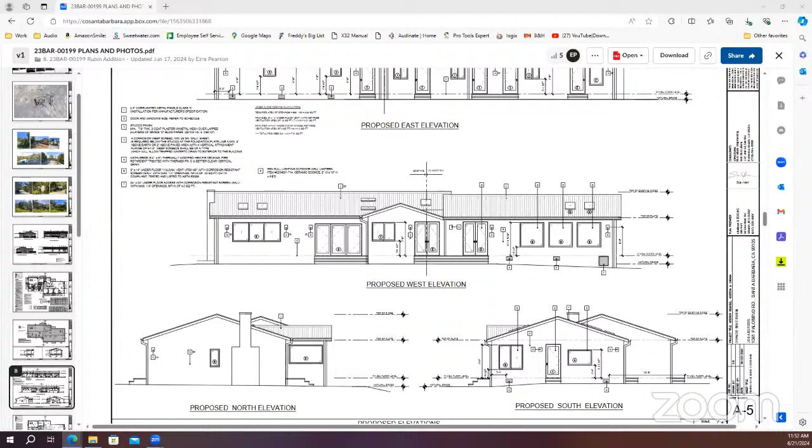And then for the landscape, I believe that is on A10. Oh no, that's the existing. A11 is the proposed landscape plan. One moment, I think Jonathan is on a call. That's okay, can you go to A11?

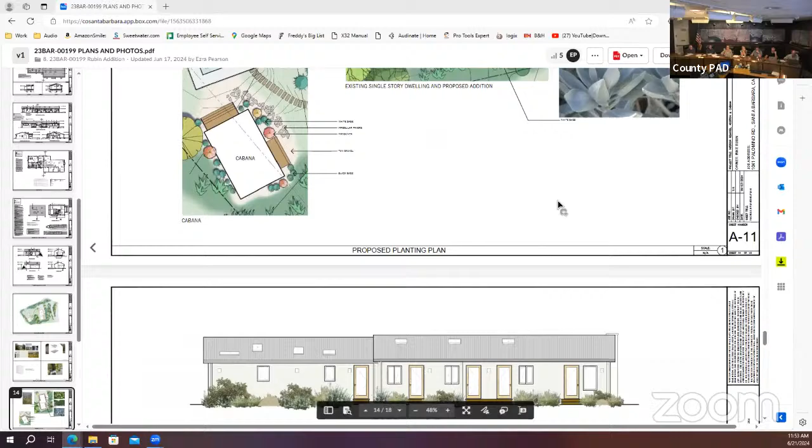Yeah, so those are the plants we're proposing to go around the house, and you can kind of get a better feel. We did some 3D renders that are at the very end of the sheet packet, the plan set, and I mean, maybe this reads better for you guys because you're all designers, but for me, the renders help the most. Those are on the back. Want to scroll a little, Jonathan, and go to the renderings? Yeah, there's the colored elevations, which are quite helpful. And then, yes, exactly.

Okay, I think we can move on to questions from the board. Does anyone have any questions?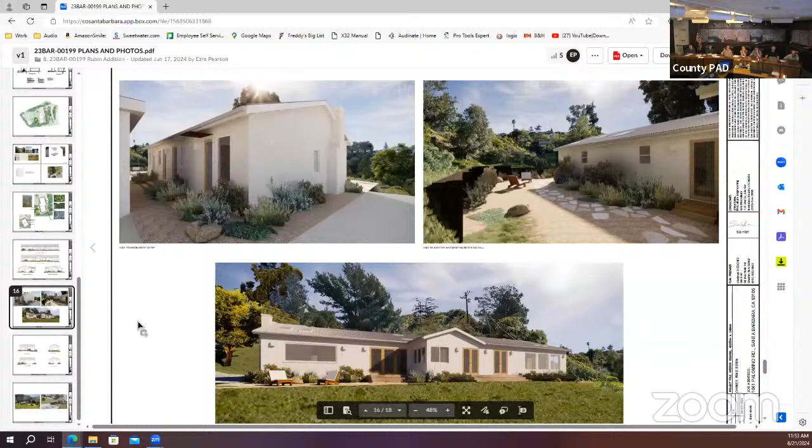The pool, well let's look at the pool. Is it a cabana too now? Yes, this is the cabana down here.

Do you have elevations as well? Oh yeah, next door, next page, there you go. Okay.

What's on the south, that big cross? Is it a garage door or what is that? No, those are just all openings, it's just all open air. The only thing that's finished in the cabana is just a sauna and a bathroom, so everything else is just open. So it's a covered porch. I mean basically, yeah. Okay, all right.

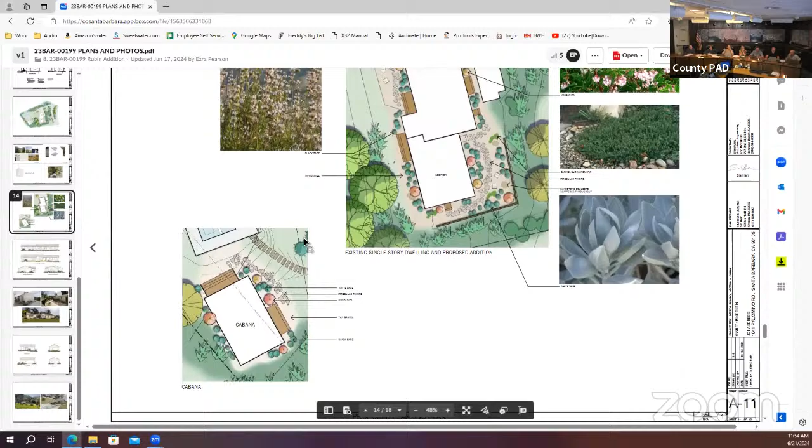I have a question. Can you go maybe to the site plan or the A9? It's fine, just kind of looking at, I'm sure it's because of grading, but it would be nice to have that cabana sort of lined up with that pool. Is there a reason that couldn't be done? It's a little awkward just having it a few degrees off.

We talked a lot about that. We did that intentionally, actually, because when we are in lawn chairs under there, we really wanted to more center it on the yard space to the left. It's just more of an open place where my kids can be playing soccer and whatnot, and that was what we thought would be the best for our family.

Okay, any other questions from the board? Yeah, could we go to the south elevation? No, of the house.

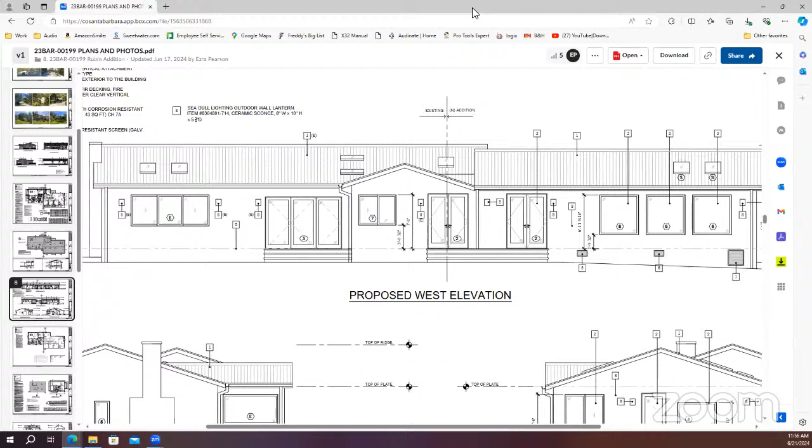I was thinking that if we look at the west elevation, it seems to have a lot of glass and no overhang there, no shade on it. It might be a good idea to think about putting, you're going to get a lot of heat gain from that glass, so you might want to put some shade element over it.

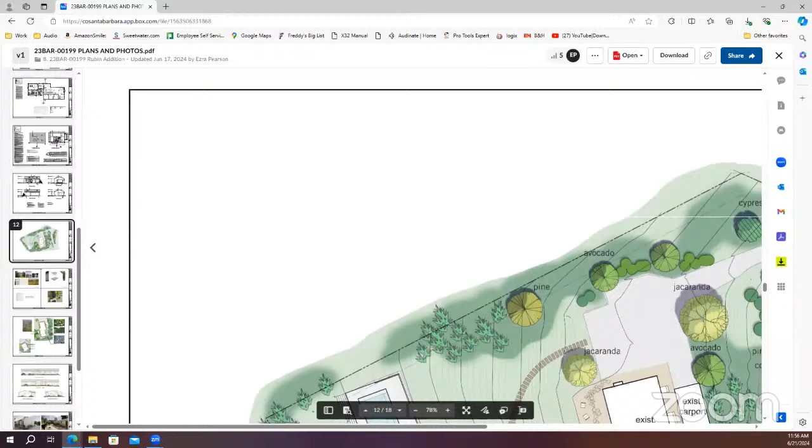Right on that west elevation, if you look on the site plan you can see it. There's some very large eucalyptus trees directly outside of those, so it's actually incredibly shady. It's even hard to see on there. If you go to the sheet where we illustrated it, sheet A9, you can see these large eucalyptus all in front of the addition. Okay, just a thought.

Any other questions from the board? Okay, we'll move on to public comment. Is there anyone online? There's no one in the audience. We have nobody online, nobody in the audience, and no letter submitted. Okay, we'll close public comment and move on to comments from the board.

We'll start with Alex. Can we go back to the renderings on page, let's see, the cabana or the renderings, I think it's at the end, there you go. That's, yeah, go to the other one, the main. No, where you were before, the picture below, there we go. In plan, the addition roof looks awkward, but in reality, as shown in this rendering, it is acceptable. So I find it acceptable.

I think the shared deck, out of one door that comes out of a gable and another one that comes out of a shed, it's awkward, but it's your residence, so you're allowed to do that. So I'm in support of this application. Okay, John? Okay.

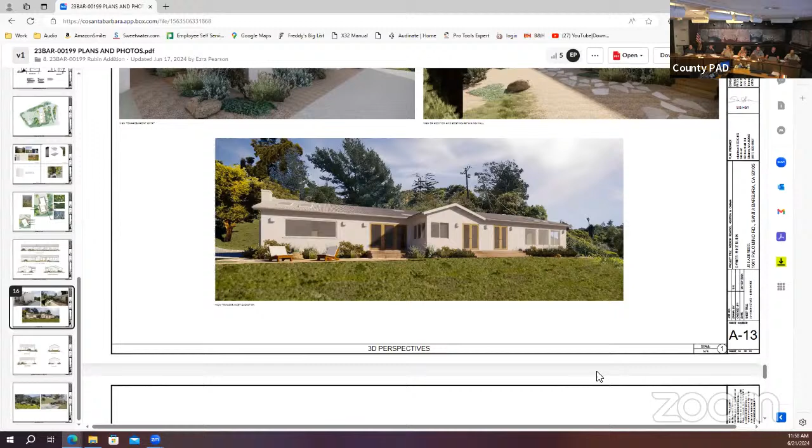Val? Can you scroll down enough that we can see? Yeah. It seems odd to me to have so many doors with no weather protection in terms of overhangs or small projections for the doors, or even some element of covered porch. It looks very bare. And I feel the same way about the pool cabana too, that it could use a little more detailing. It just looks like a kind of a stucco box with some holes cut into it.

You could put, I just think it would be more livable with some projections, some additional roof projections of trellis or porch. Right over the front door we do have one to differentiate between the side doors, you can kind of see it in that rendering on the top left. It's that patinaed steel overhang that comes right over the door to make a little more of a threshold space. We call that minimalist. I mean that was just kind of the direction we were taking. We liked a very soft palette, and we were just trying to really keep it as minimal as possible. It was kind of the intent.

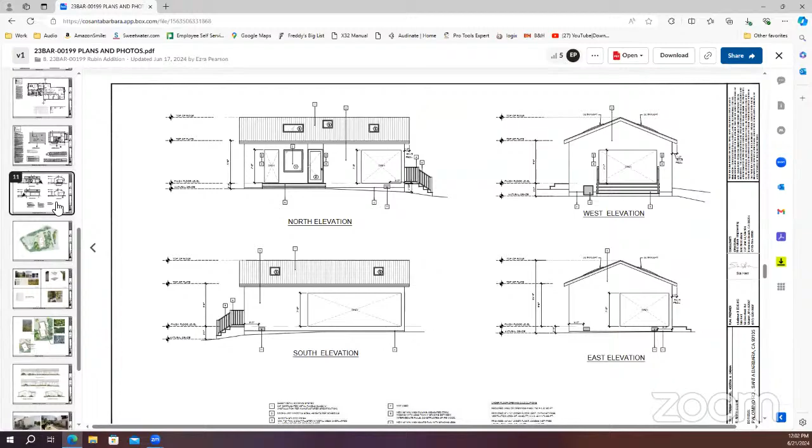What are you looking for? Yeah, go up one sheet there. Just look at the layout of this, how the bathroom and the sauna are right in the middle of the space, and there's a door to the side of the sauna. The whole space is split up into a C shape that makes for a lot of unusable space, when you could take that sauna and bathroom and locate it in one corner and give yourself this grand open space in the middle, which is probably what a cabana wants to be. So it just struck me as a little odd.

Also, I agree with Valerie that the openings into that cabana are awkward. It has a quality of a building that just didn't get finished with windows, or some windows and doors. Those openings feel like a sliding glass door should be in there or something. I think there's a different way to detail it to get you what a cabana wants to be, but again it doesn't make a big impact on the public. I'm just saying this because it kind of caught my eye a little wrong.

Madam Chair, may I add a comment? Yes. It seems like the feeling of the board is that it's a very austere building, and it could be modified by either recessing some of the openings or doors, or adding a little trellis or shade structure, or extending the roof overhang out a little bit, which would help the overall aesthetic of the building a great deal. I think you should give some serious thought to that.

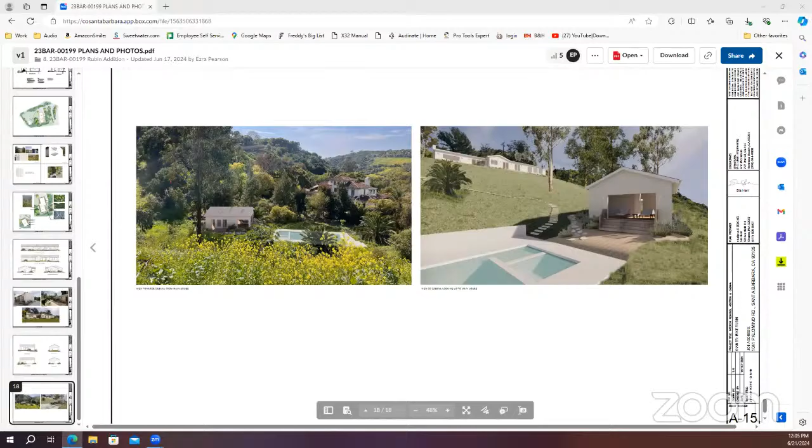Okay, great. So I have: size, bulk, and scale of addition is acceptable. The board appreciates development of the proposal since the project was last heard. Consider overhangs or weather protection above door openings in the single-family dwelling and cabana. Cabana requires additional architectural detailing, include roof projections such as a trellis or porch.

All right, so with those comments, you can return prelim full board next time you come. Great, thank you. Thank you.